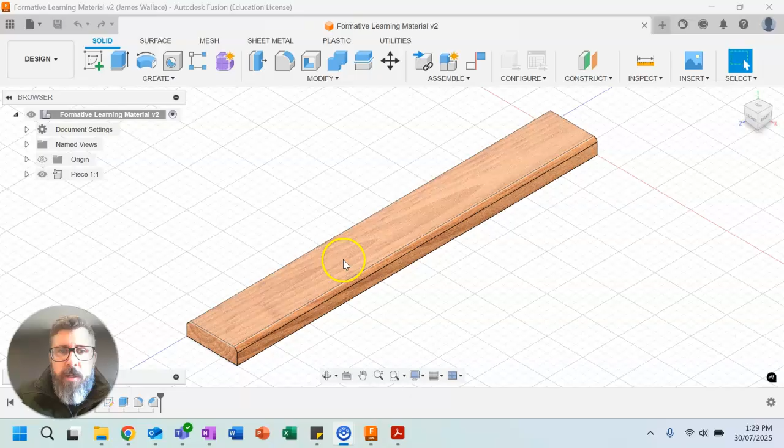In this second tutorial, we'll be taking this first bit of material that you made in the first tutorial, and we will be making a second piece because for our formative learning tasks, we have the two bits which we'll be going to be learning our jointing in.

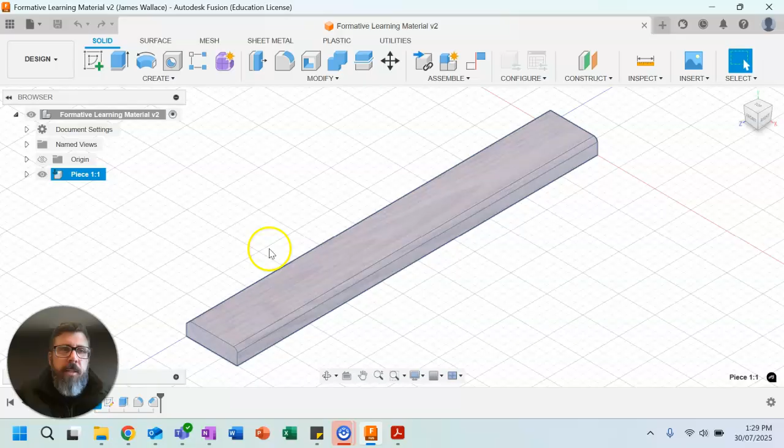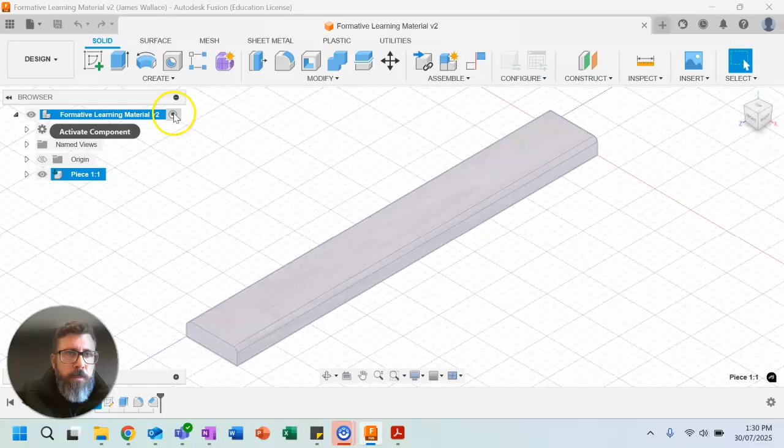The easiest way to do this, because they are exactly the same when looking at this, is we want to highlight our piece 1 and right click over here on our tree, and we want to go to copy. So I have copied this first one that we made in our first tutorial. We want to make sure that this button up here is selected, and so this black dot is up the top where it says formative learning material.

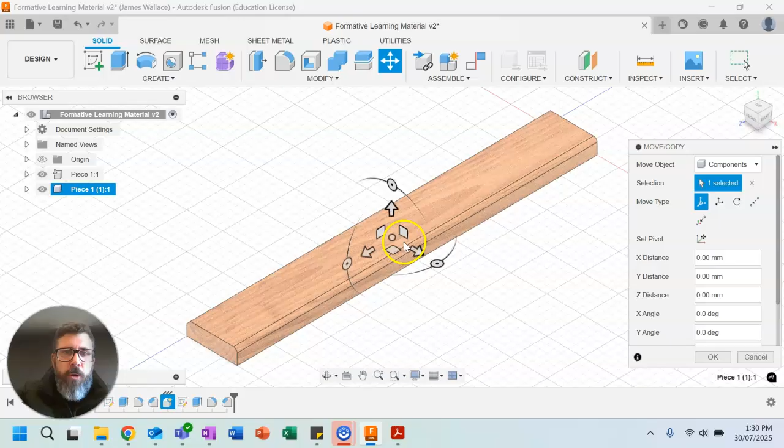I'm going to right click here, and now this is very important. What we're going to do is we're going to go paste new. We don't want to just go paste, we want to go paste new. So if we click that, we should get another one that loads up here, and if we grab this middle dot and drag it across, we can see that we now have two pieces that look identical, but we want to rename this one, and we're going to make it piece 2. So now we have piece 1 and piece 2, which look identical.

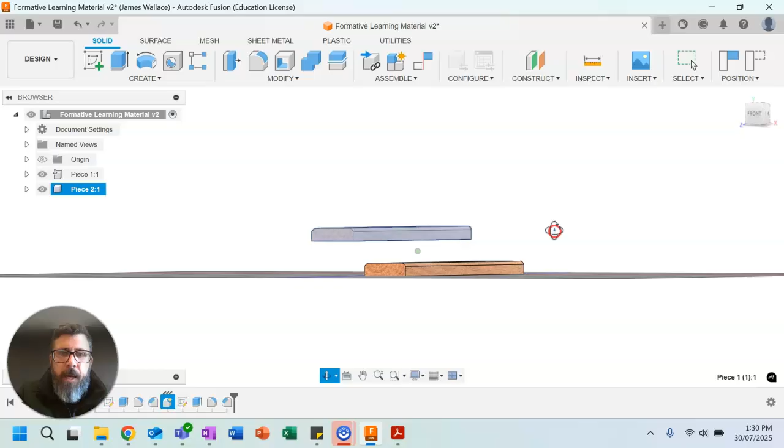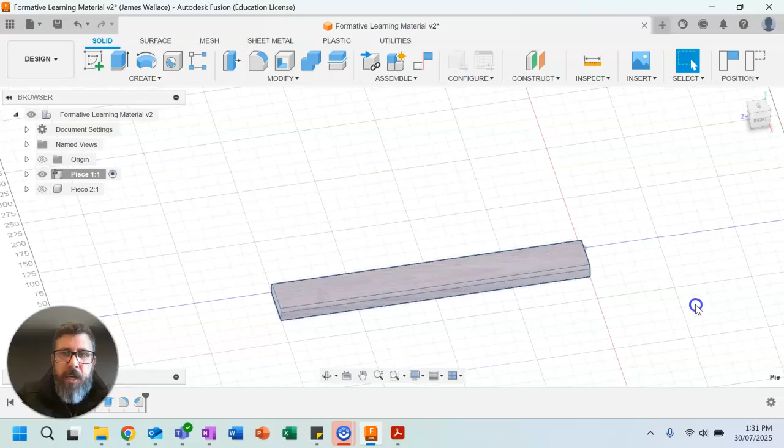I'm going to hide piece 2 though for now, and we will just be working on piece 1. So to work on piece 1, I want to select, so that black dot moves from our formative learning material and onto piece 1, and everything else should disappear, and we should be left with the piece that we made in the first tutorial.

We want to start making it look like this one. So to start with, I'm going to be working on this end. So our material is 70 mils wide. So we want to take out 70 mils of our material for a straight halving joint. And we will be taking out 10 mils because it is a halving joint, so we're taking out half of that material.

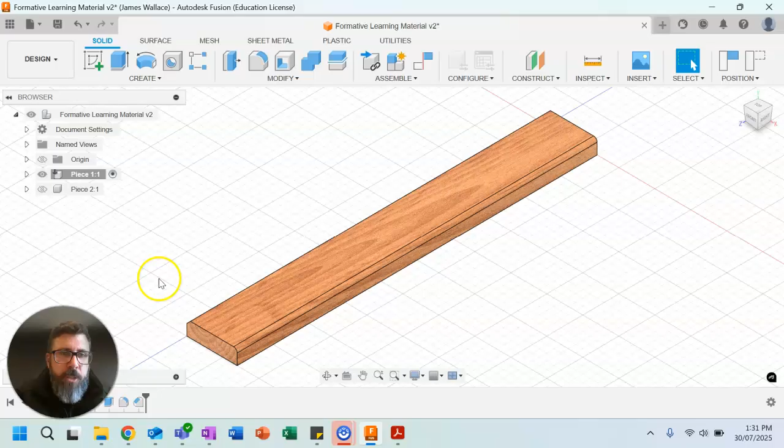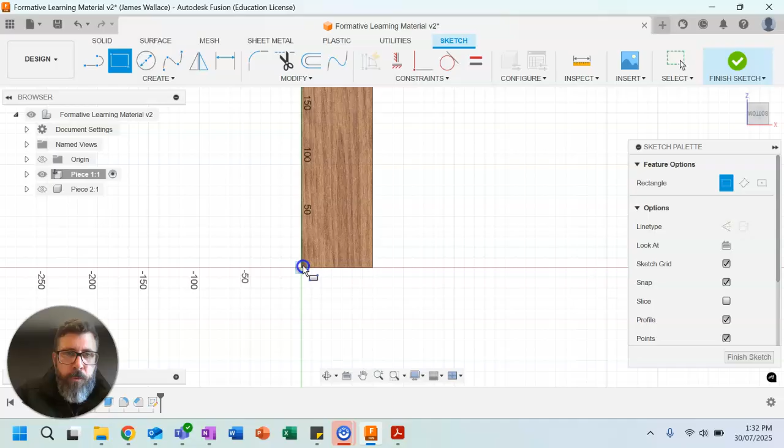So we want to hold down Shift on your keyboard and use the scroll wheel. We should be able to slide around to the bottom. I'm going to select the bottom, and we're going to create a new sketch on the bottom piece there. Easiest way to do it, we are going to get our 2-point rectangle tool, and we're going to go 70 and 70.

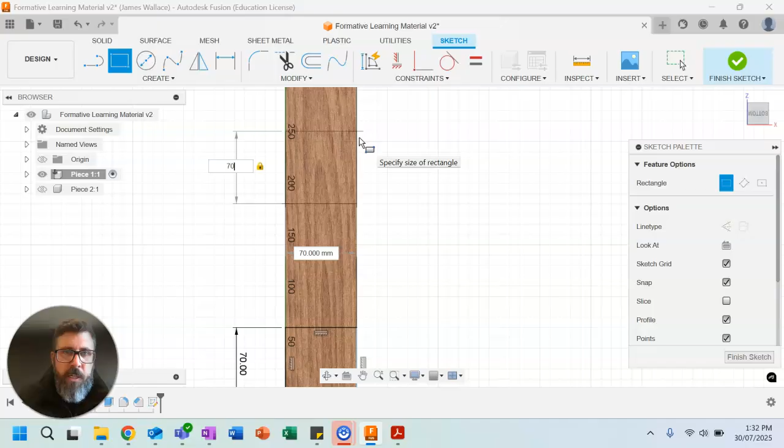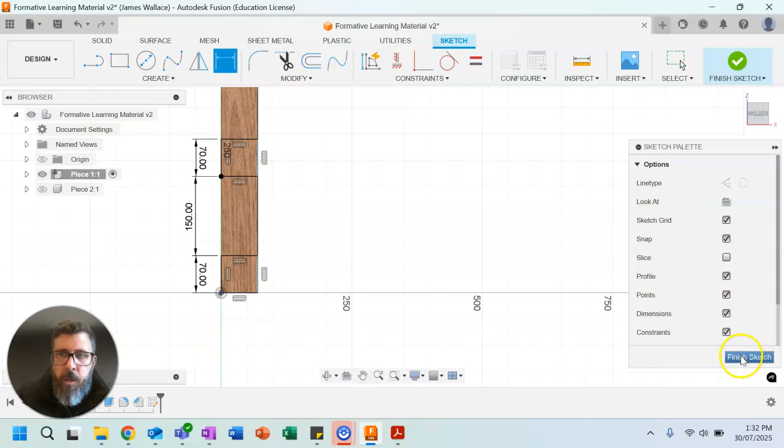We also have this T halving, which is another 150 mils up from that one, which is also just straight across another 70. So we're going to create a second rectangle that comes up 70 and 70. Now using our sketch dimension tool, which is what looks like this, or it is down the bottom of the menu here, we're going to make sure that the distance between those two is 150. So I'm going to change that to 150, and that should move that up.

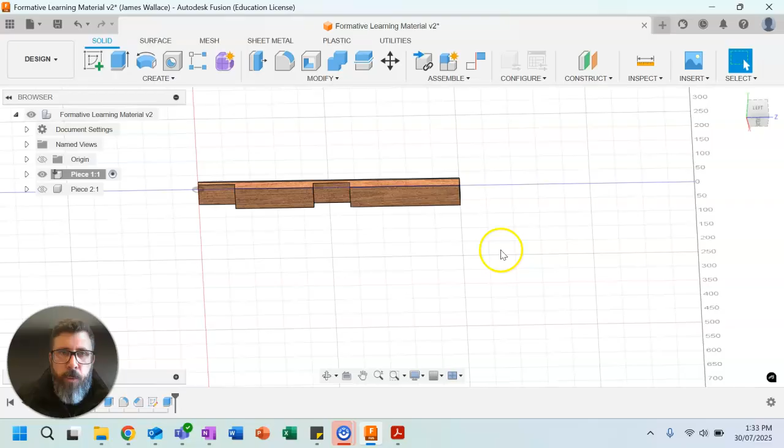If we finish that sketch, we can see that we now have two rectangles, which I can highlight by holding down Shift on the keyboard. We want to extrude them, but we are going to negatively extrude them. So our distance needs to be -10. If we hit OK, we can see that we have taken out half of that material on the bottom for our T halving and our normal halving joint there on the end.

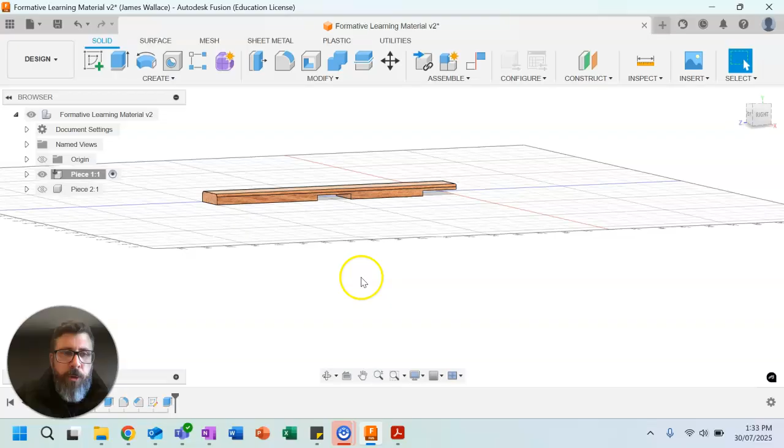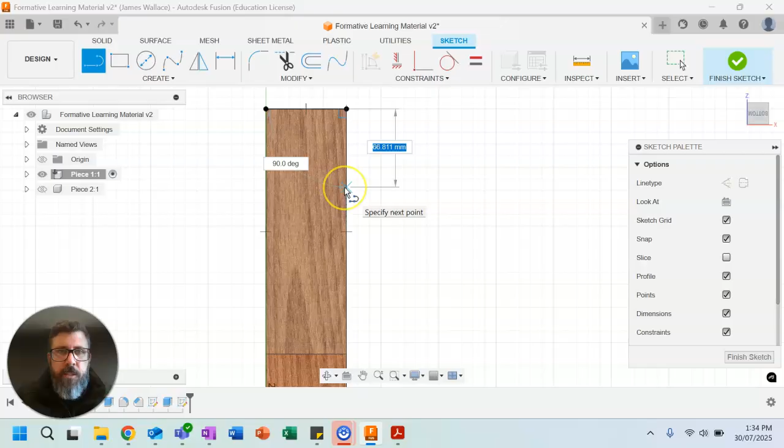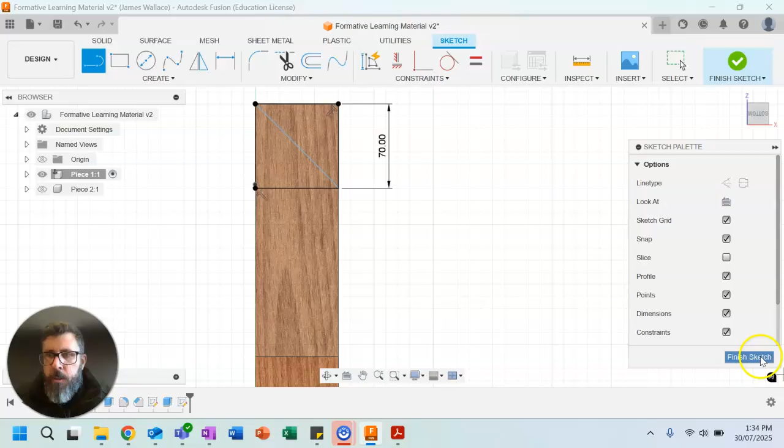We're going to use just our regular line tool. So our regular line tool, if we go across, and then we want to come down 70. Also across. And we're going to create a square with a line through it. So I'll finish that square. We should have 2 lots of triangles here.

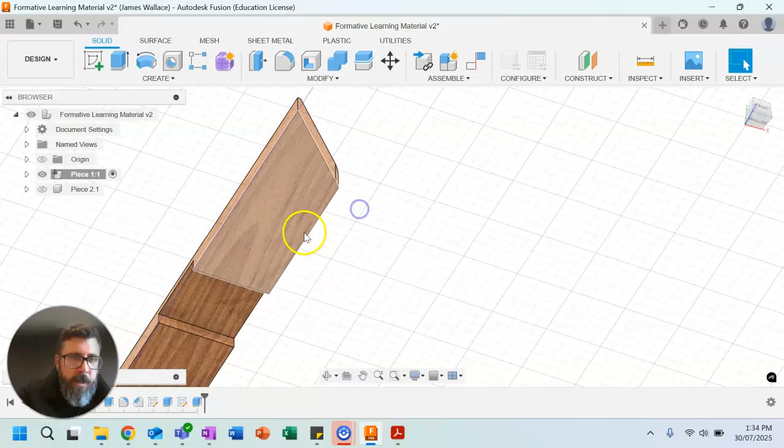What we're going to do with this first triangle, I'm going to select that one and we're going to negatively extrude that one all the way through. So I'm not going to type a number in this time. I'm just going to grab this arrow. I'm just going to drag that up and that's going to take that away. Unfortunately, that means that our sketch is going to disappear.

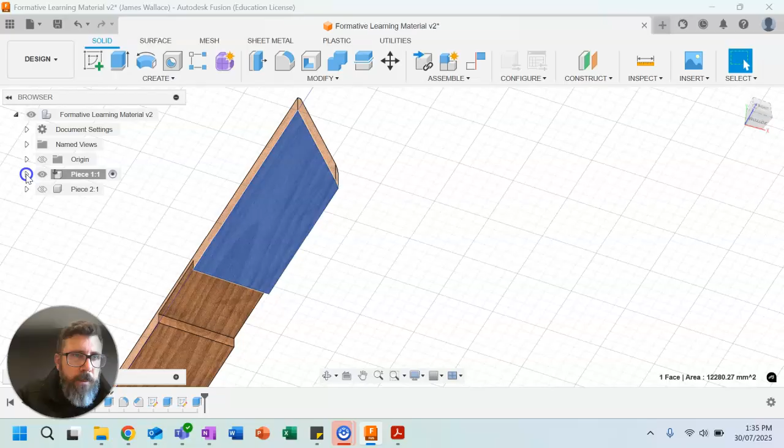So we're going to need to come down to our itemized window down the bottom here. And I'm going to select the sketch, and I'm just going to select it and we should be able to highlight. No, that's not going to work. Sketches. I'm going to need to bring back this sketch. So drop down this menu. We can go sketches, it should be sketch 2 or 3. And then we're going to negatively extrude that -10 again.

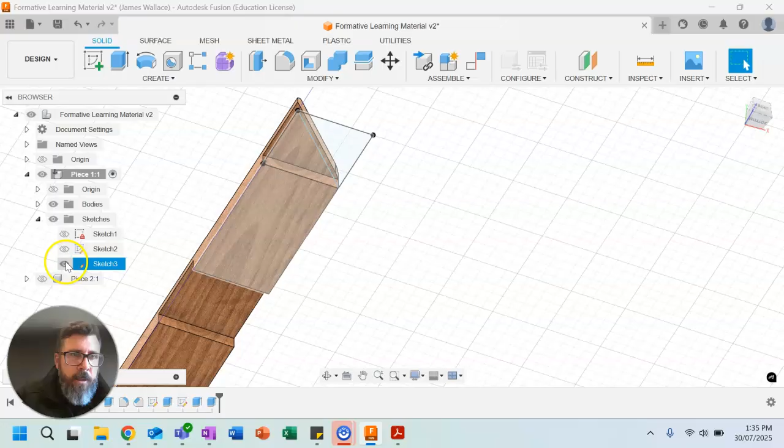And we hide all that. Oh, go back, open that up again. Hide that sketch. We can see here that we have now created a mitered halving.

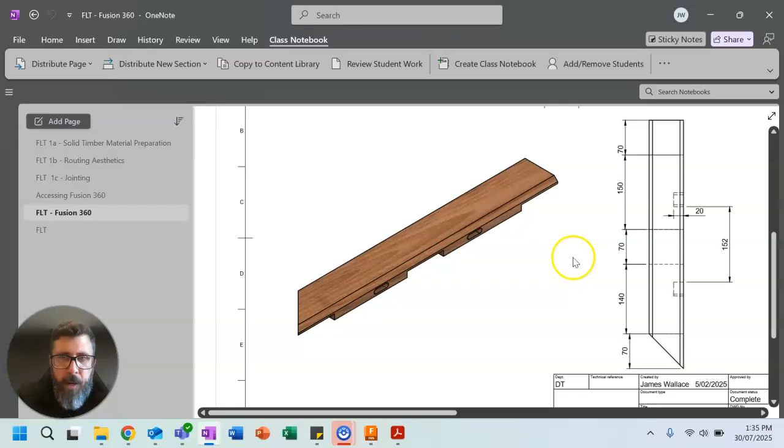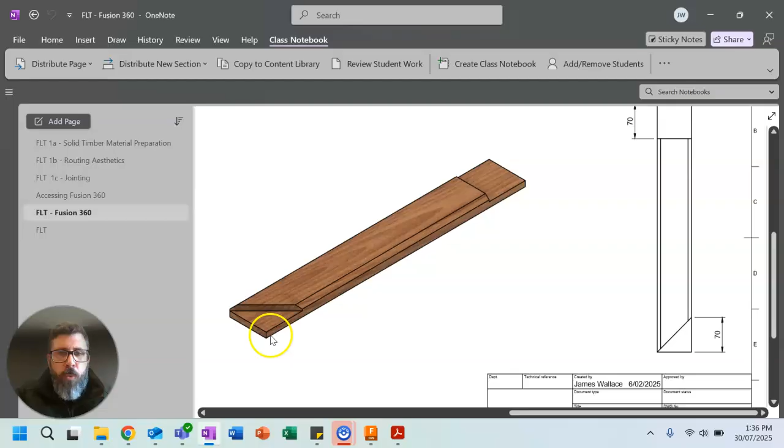So using the knowledge for this one, what I would like you to do is make the second piece, which was this one. This one's going to be a bit easier because we've just taken a halving out of the top and also a 45-degree 70mm bit out of there to make our mitered halving. Try to align it so that this one here, the triangle, matches the one from the first piece that we made because we want them to fit together.

So it needs to be the opposite direction to this one. In the next tutorial video, I'll be showing you how we can join them together and have a look at them.